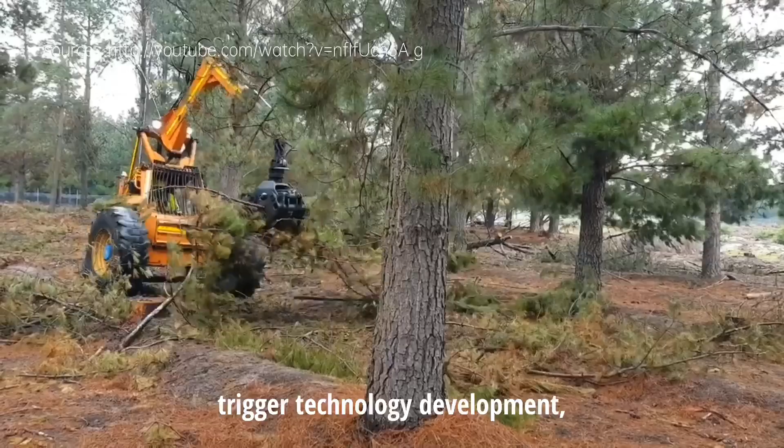Economic growth, industrialization, and population growth trigger technology development and also cause increasing diesel use, which can affect the air, water, and soil, causing more pollution problems.

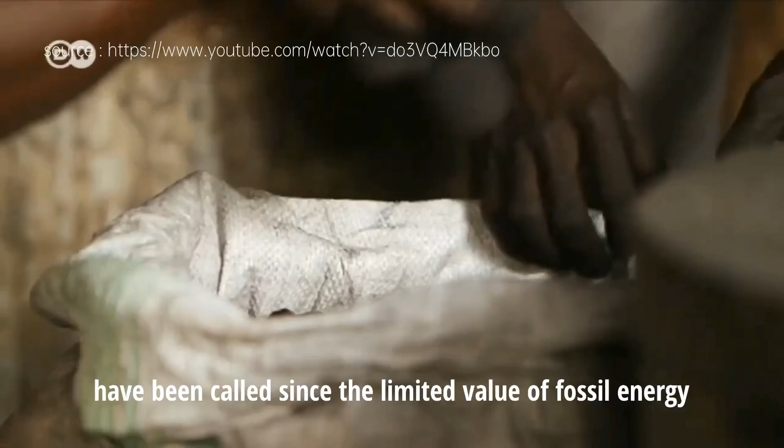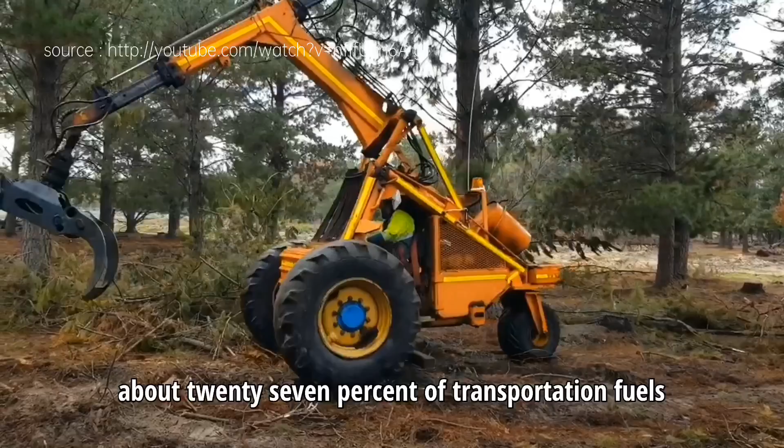Solutions using renewable energy resources have been called for since the limited value of fossil energy became world attention. Energy from biomass has been the center of world attention due to many types of research about promising renewable energy. The yields are very promising, following the International Energy Agency, who states that in the next 30 years, about 27% of transportation fuels could be fully supplied from the use of biomass and the processing of waste.

Agricultural activity plays an equally important role in human life, since no human is able to make their own food. Besides that, evidently, agricultural waste is produced more than the product itself. In Indonesia, agricultural waste processing is not done very properly.

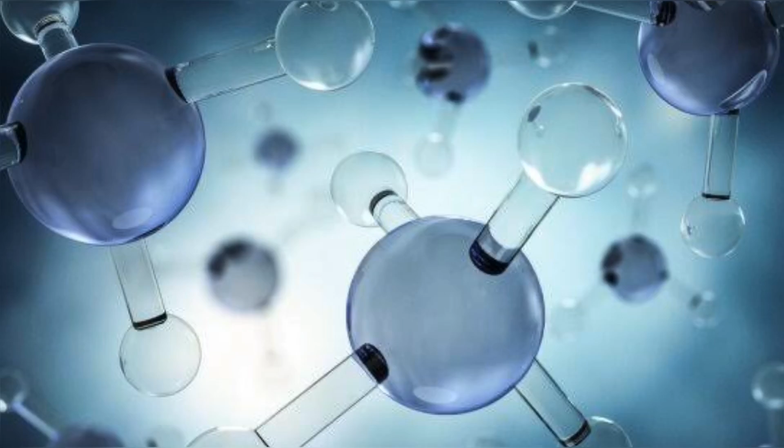In order to overcome the problem, development of pyrolysis into fast pyrolysis can be applied. In its process, fast pyrolysis can produce energy in three forms: bio-oil, methane, and charcoal. Fast pyrolysis produces more bio-oil than methane and char. About 76% of pyrolysis yield is bio-oil, while the rest is methane and charcoal.

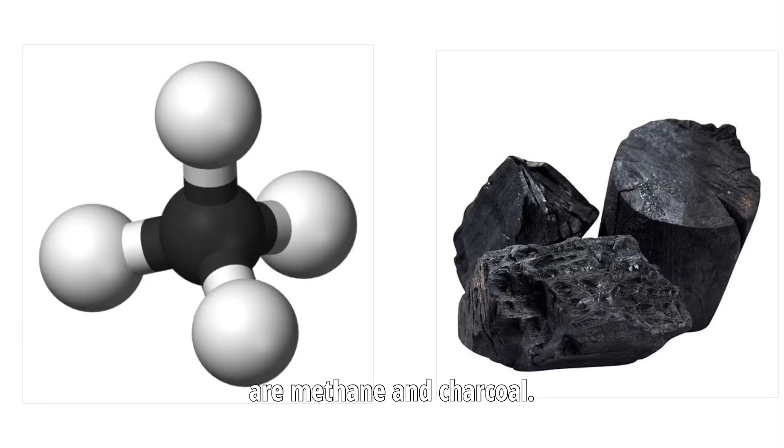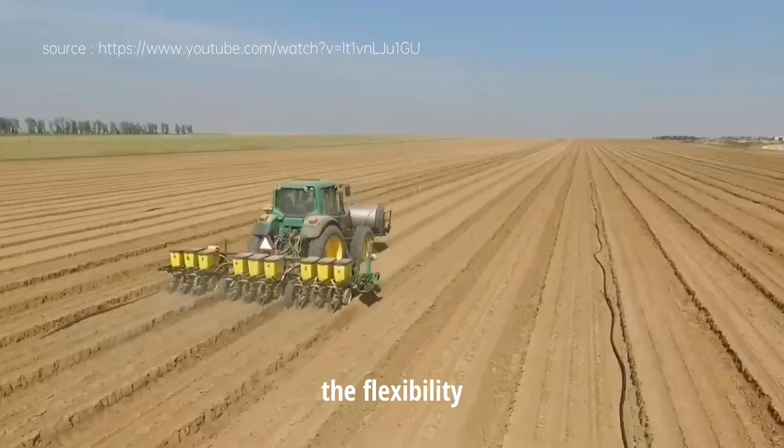Bio-oil is a form of energy that is very promising in the future because it has high flexibility of transformation path, moving from fossil fuel into green energy. The flexibility is in how diverse upgrading systems can be applied to produce bio-oil. Some methods of bio-oil upgrading can produce abundant energy that can be used for any human activities.

Aqueous-phase reforming will produce alkane and hydrogen. Hydrotreating will produce gasoline and diesel. Zeolite cracking and esterification will produce upgraded bio-oil for mixed ingredients for other products. Gasification will produce upgraded bio-oil, methane, gasoline, diesel, kerosene, alcohol, and hydrogen.

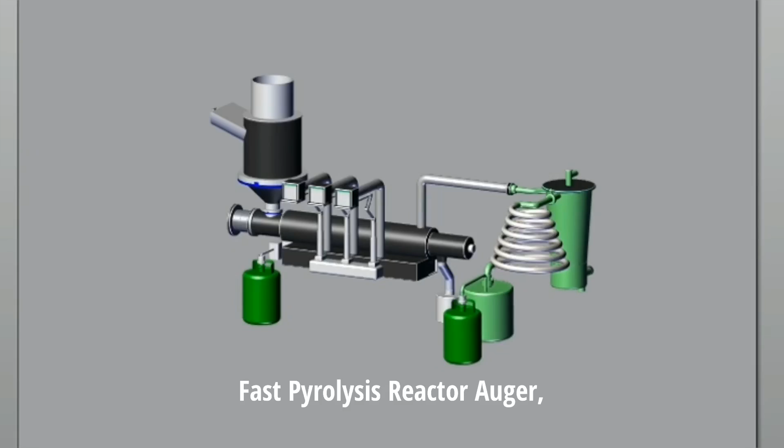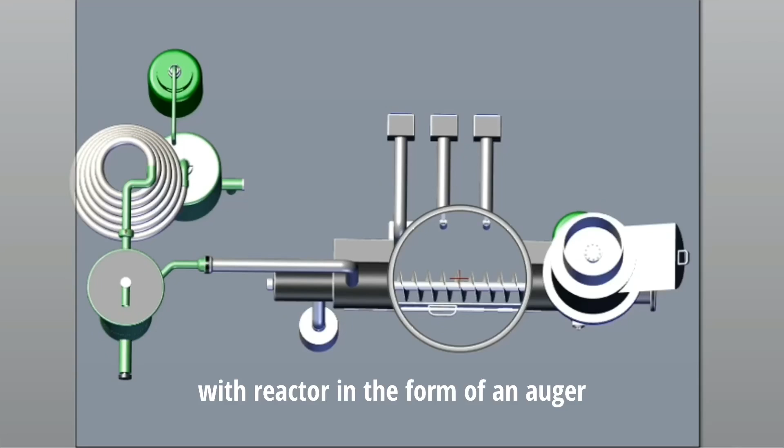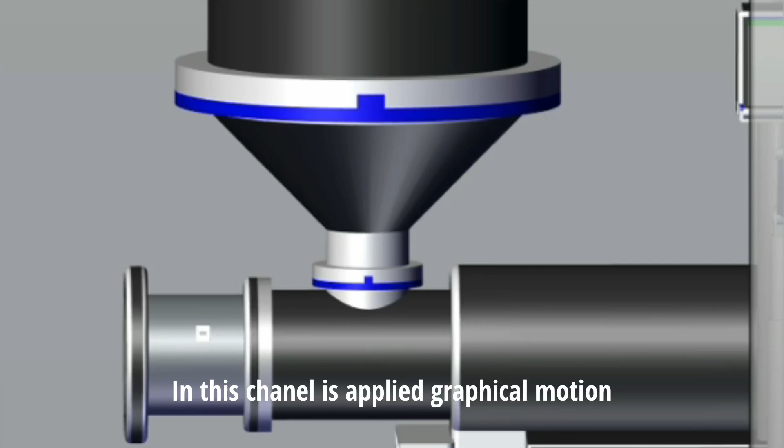When the raw materials in the form of straw and husk enter the device, those materials will be blended by a sharp blade until they turn into more subtle biomass. In this channel, graphical motion and a particle measurement sensor are applied for monitoring homogeneity of the biomass particle and recording bio-oil yield.

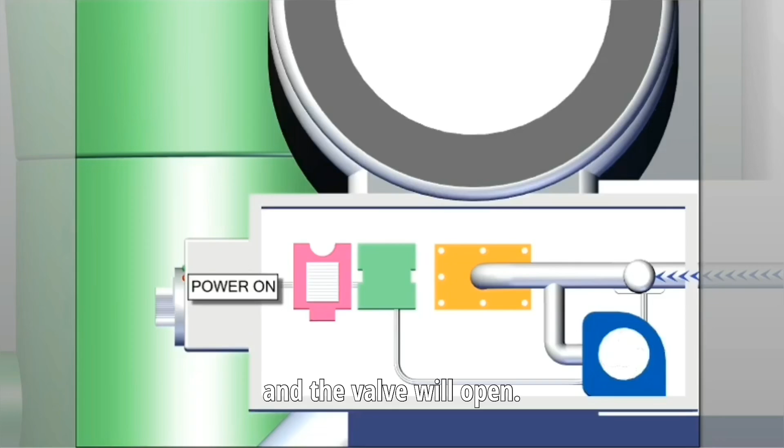Gases are used to heat up the biomass inside the reactor. When the temperature has not yet reached the optimal value, which is 600 degrees Celsius, this device will automatically turn on and the valve will open. Automatically, the blower will turn on for maximum combustion in the reactor.

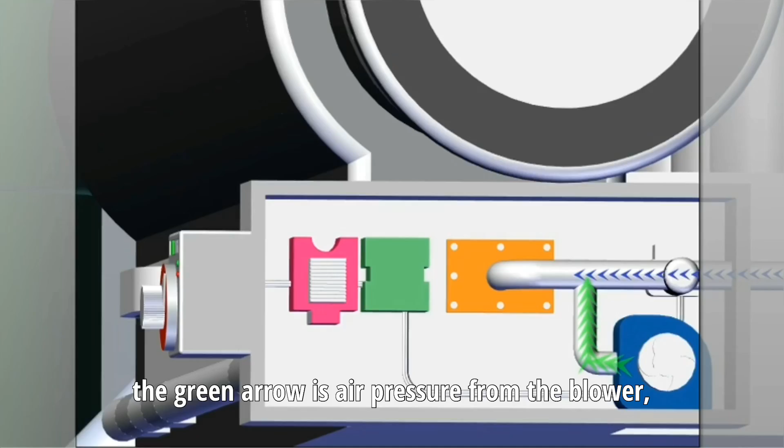The blue arrow shows gas entering. The green arrow is air pressure from the blower, and the red arrow is heat from unselected component combustion.

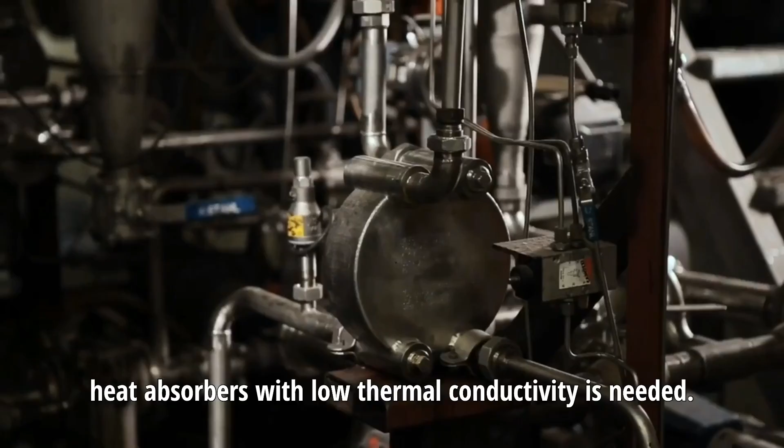To support the fast increasing of reactor temperature, heat absorbers with low thermal conductivity are needed. For the pyrolysis process, the good insulators are polyimide, composite aerogel, and lightweight ceramic. The combustion takes place in a 4.4 meter reactor, which is channeled with a 13 centimeter diameter pipe.

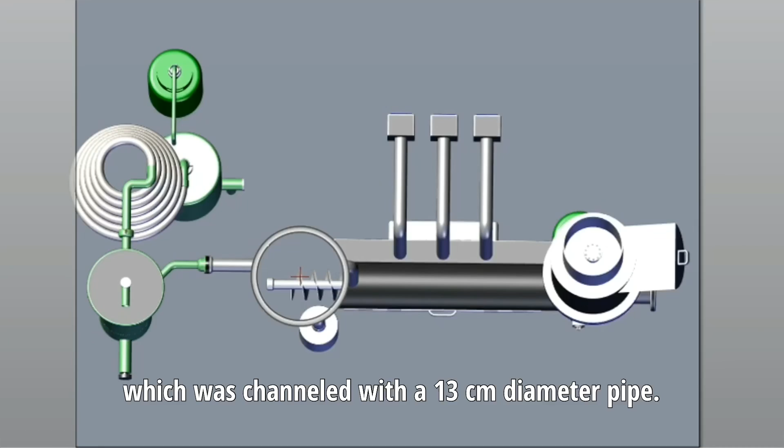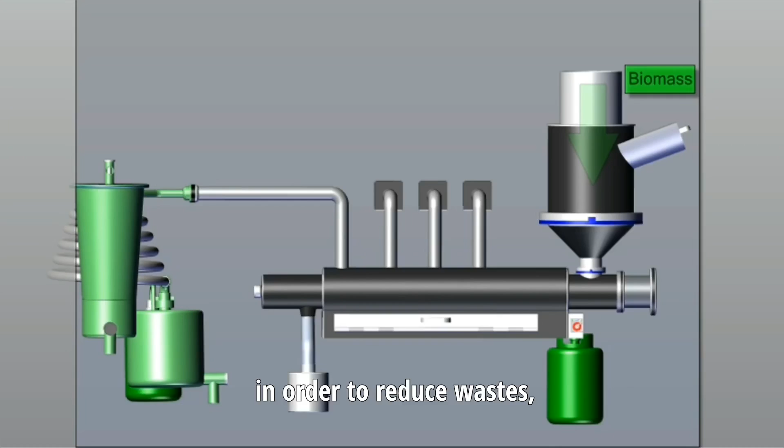Traditional combustion also happens to burn other components that can be transformed into bio-oil, in order to reduce waste, to keep reactor temperature stability, and to minimize the use of gas.

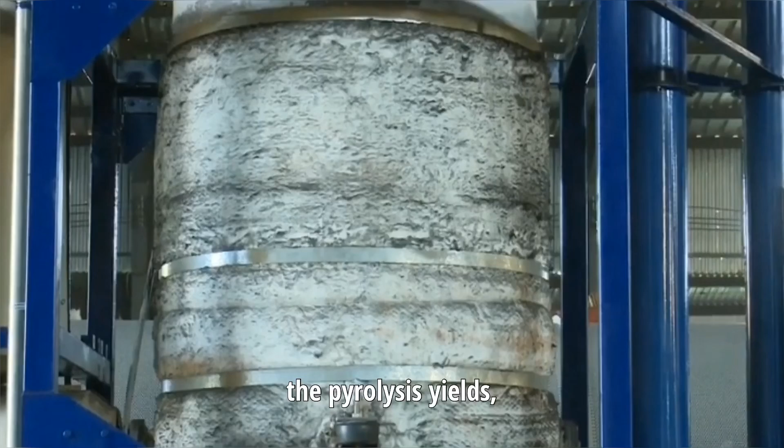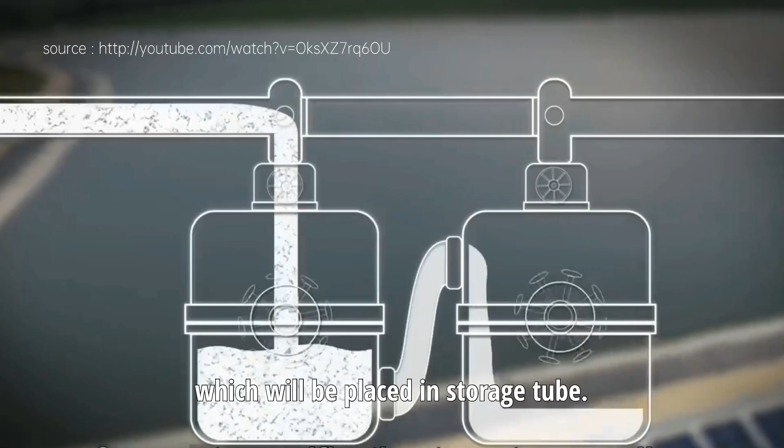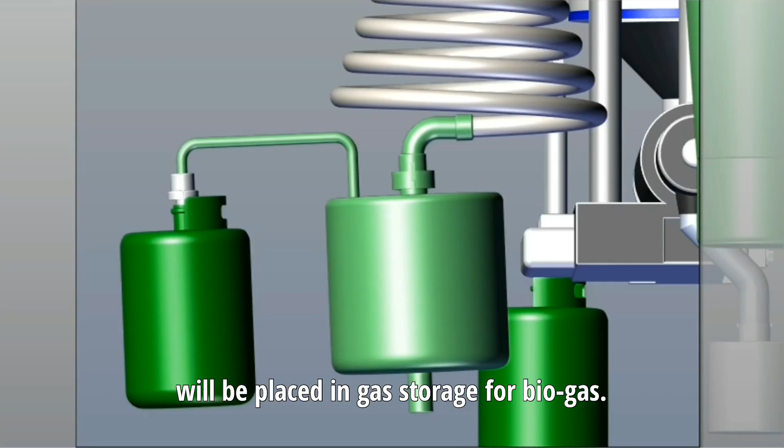After combustion, the pyrolysis yield, which is biochar, will be accommodated in a container, while the volatile components will evaporate toward the pipe and condense twice to obtain bio-oil, which will be placed in a storage tube. The uncondensed gas will be placed in gas storage as biogas to save gas fuel for combustion.

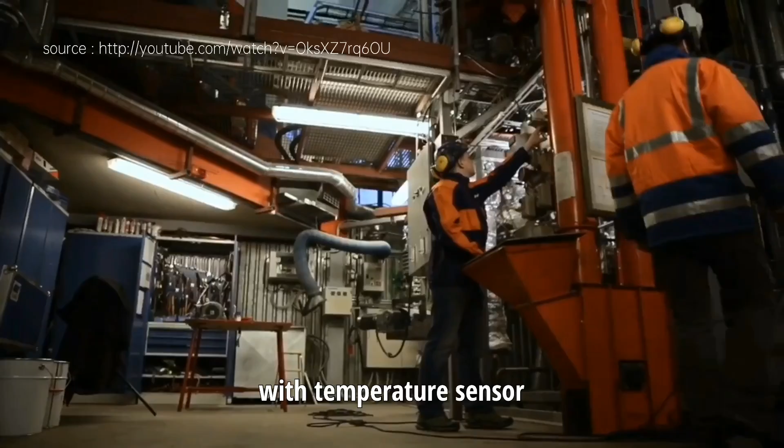After being turned on, the reactor system is automatically integrated with a temperature sensor for gas valve setting and a blower for automatic and measured pyrolysis energy needed. FPRA is a form of service for farmers to help them optimize agricultural waste processing.

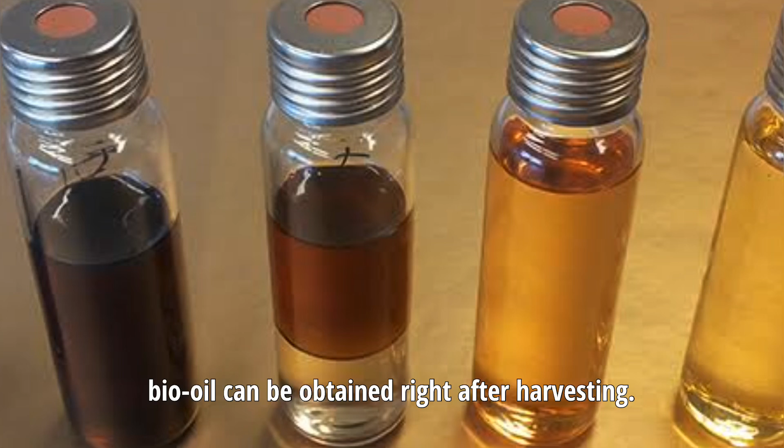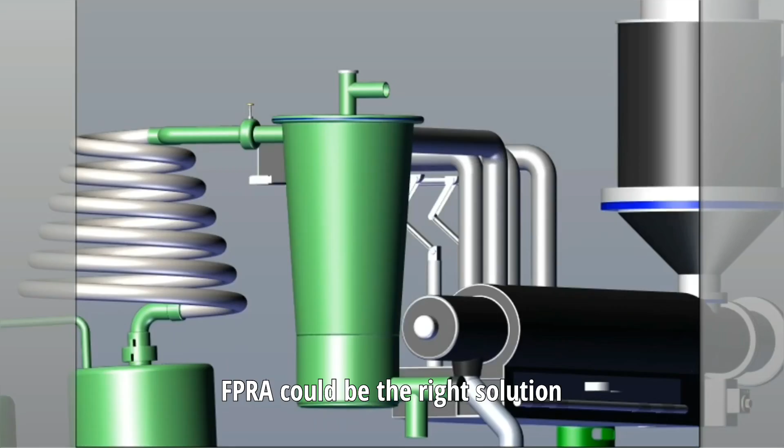With the mobile pyrolysis method, bio-oil can be obtained right after harvesting. Mobile pyrolysis could surely be helpful for farmers, since the utilization is very practical to operate. FPRA could be the right solution for optimizing agricultural yields.